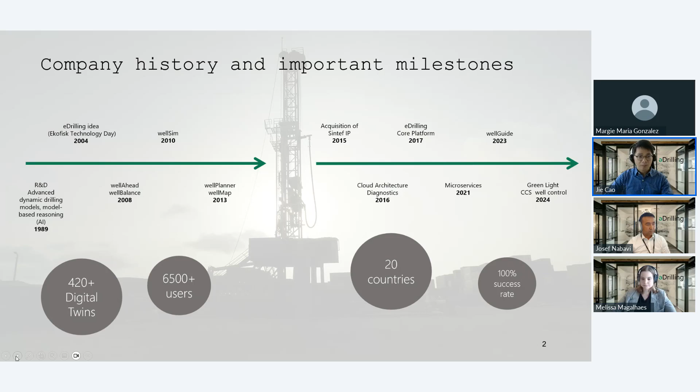So next, with more than 2 decades of R&D, now eDrilling has a suite of drilling software for the whole life cycle of drilling process, from planning, preparing to executing or reviewing your drilling operations. Those softwares have been used and verified by the industry for almost 2 decades. Those different pieces of software aim to meet different challenges in various phases of drilling using our unique state-of-the-art technologies.

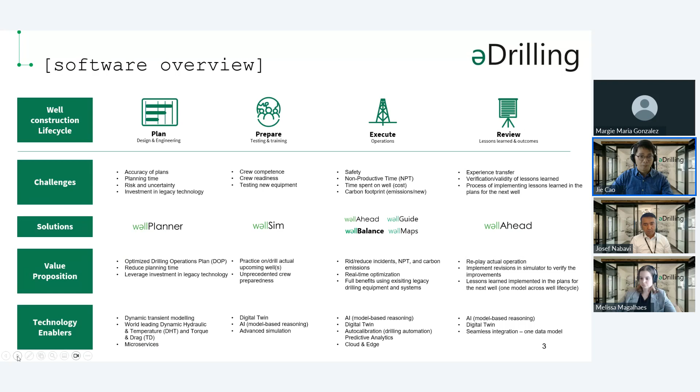Today, we will be focused on MPD software, which is wellBalance. But of course, if you are interested in other applications or software, you are more than welcome to ask for a demo. So back to wellBalance, the MPD software.

In general, it is advanced software to improve any of your MPD control system to better keep constant bottom pressure during your MPD operation. It is enabled by accurate dynamic, thermodynamic, and hydraulic modeling. It is reliable to accurately control your pressure and help you to optimize your planning and specific procedures.

How it works? It is embedded with any of your third-party control system with input from the operations, and it continuously simulates the pressure profile, temperature profile in the well, and acts as the brain of your MPD control system. Besides, a 3D visualization module is also available while drilling to help you to navigate to where you should pay attention to, like the ECD at casing and the pressure at the bottom hole, etc.

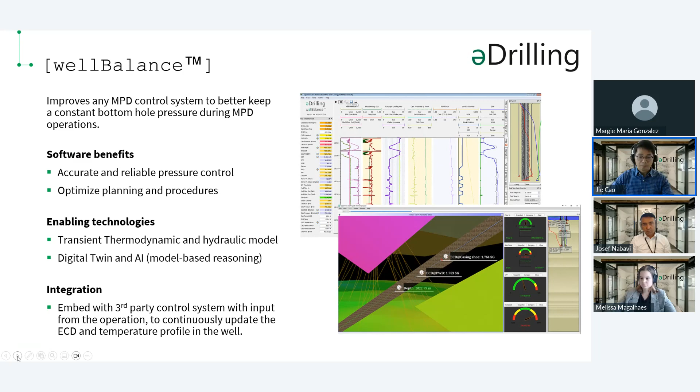So next slide, we have the software which has 2 modules. One is the MPD real-time. We call it wellBalance to help you control and to provide set points for your MPD control system based on the dynamic real-time simulation.

The other module called wellBalance Offline is used to plan, to test, to analyze your MPD operations and procedures. This is offline software that you can play with on your computer, not in real time. It complements the real-time wellBalance software.

The dynamic model mentioned accounts for essential effects for MPD, like dynamic surge and swab, various pump rates, drill string rotation, dynamic temperature effects, cuttings transport, and also set point pressure at any depth, even though we usually use it at the bottom hole. The supported operations include drilling, reaming, running strings, tripping in and out, cementing, fluid displacement, static periods, and other dynamic tests like formation integrity test, leak-off test, and pore pressure test.

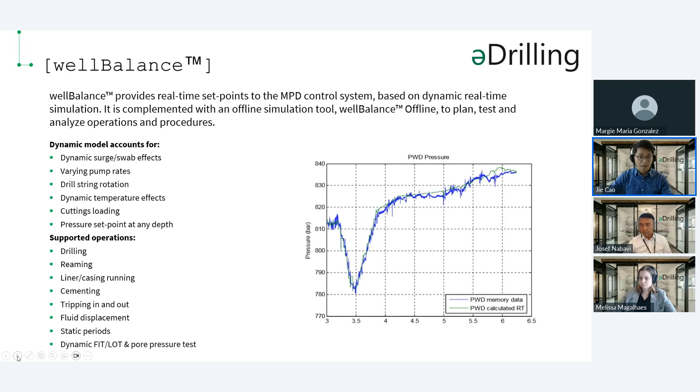So the superiority of this software is mainly due to the accurate dynamic modeling we have used for this software. This has been verified and recognized by the industry for the last 2 decades. Compared with the commonly used steady-state models, it automates continuous modeling of the profile from real-time data and previously calculated data sets. This results in accurate temperature and pressure profiles together with the fluid and cuttings transport.

It also includes the transition period effects when changing operational parameters. Therefore, the drilling pressure margins are precisely narrowed such that you can reduce the uncertainty associated with your operation as well as the operational risks.

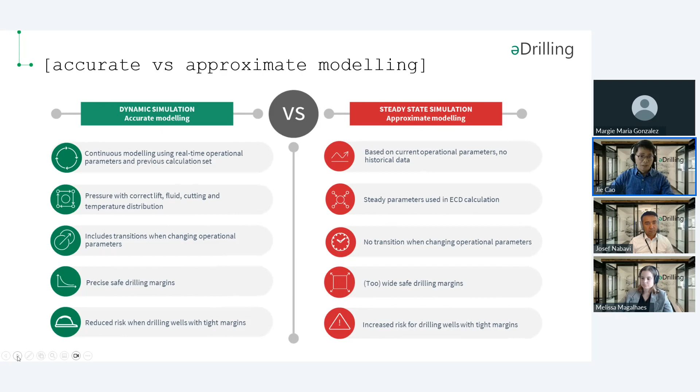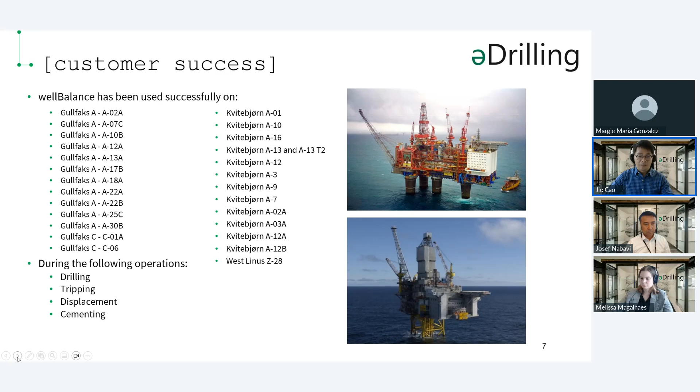So the software has been used in many wells since 2010, especially in the North Sea, like the wells we listed over here. And the operations for those wells are drilling, tripping, displacement, and cementing, of course, together with other tests and experiment tests. So this software has been successfully used, verified, and recognized for MPD operations.

In the next slide, we listed a few operational examples to verify the simulation. First, on the left is the dynamic FIT test. As you can see, especially in the middle, the blue dots increase stepwise, and the simulated results match the real-time measurements very well. On the right figure, we have the dynamic drawdown shown by the green dots, and the simulation, which is the line, perfectly matched the whole process, which means the simulation is as accurate as possible.

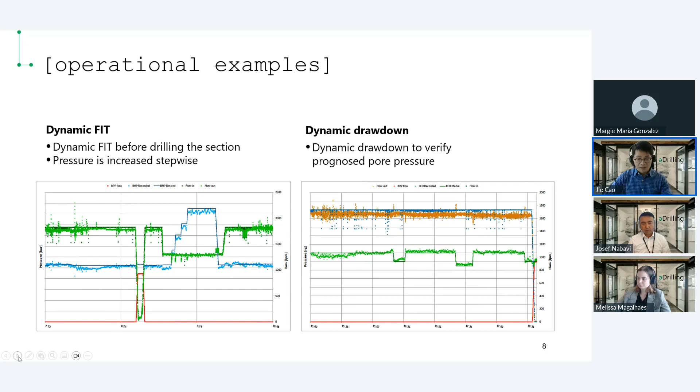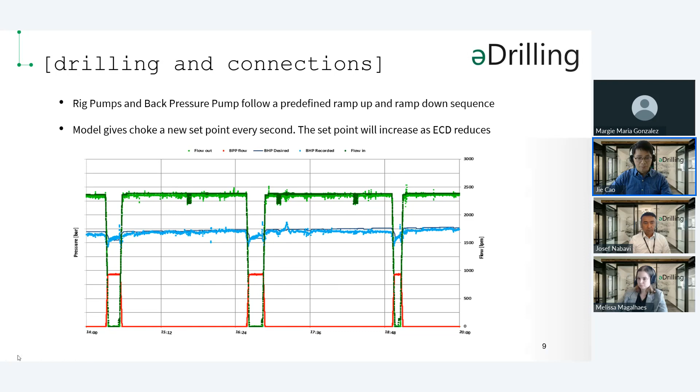In the next slide, we have drilling and connection operations. This is a predefined pump ramp up and ramp down sequence. So we try to simulate the process with our advanced model. As you can see, the flow out and flow in, in the green dots, ramp down for a period and then ramp up. It's a predefined sequence, and the results from simulation can perfectly catch the trend, the change, and the dynamics in real time. So those are pieces of verification of our simulation.

And next, let's join Josef for the real play of the software. So, Josef. Thanks, Jie. I'm going directly to demo the software. Let me share my screen. Okay. Can you see my screen, Melissa? Yes. Yeah, good. Thank you. Okay.

As Jie mentioned, the wellBalance system has two parts. One part is offline wellBalance, which is used for the planning phase or optimizing the planned operational parameters. This one is a standalone software which can be used by itself to do any type of MPD or other type of simulations. To run a simulation on this software, you need some input data. Let me go through that quickly.

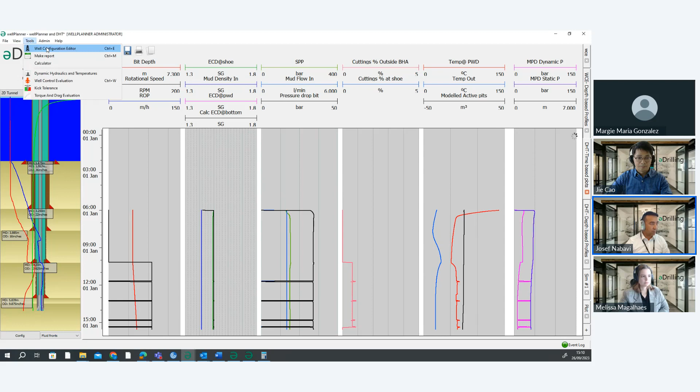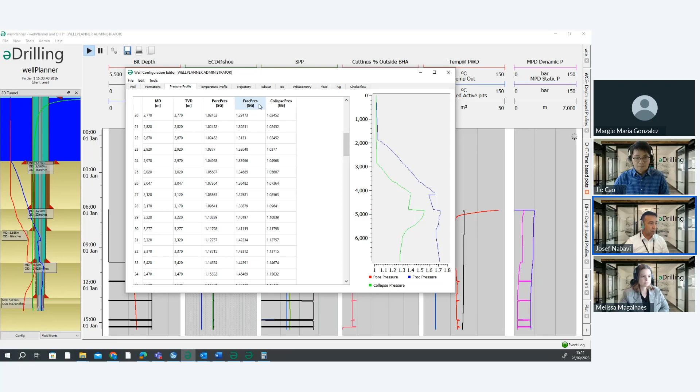If I click on the tools, there is a well configuration editor. This is the static data you need to input into the software to create a digital twin of the wellbore you are planning to drill, or any other type of operation. For this purpose, you need input data: formation tops, pressure profile, pore pressure, fracture pressure, and collapse pressure. Temperature profile, static temperature, and then you have the geothermal gradient here.

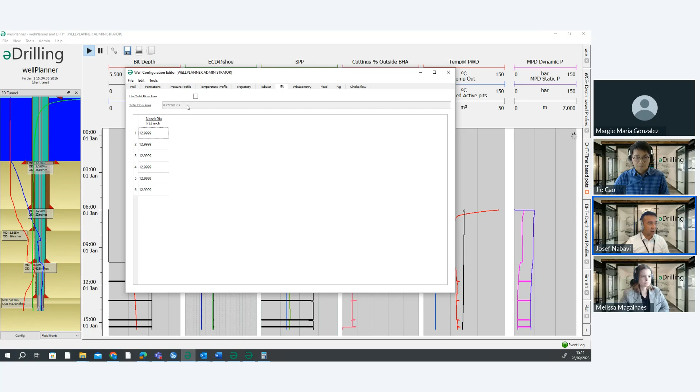Trajectory, tubulars, both BHA elements and different types of drill pipes. Bit, either you input the nozzles or you can only input the TFA; one of them should be okay. Wellbore geometry, you have here different casings, liners, and the riser. If you have an open hole, you add your open hole here as well. On the fluid, you add rheology, PVT table if you have it, gelling, and those parameters.

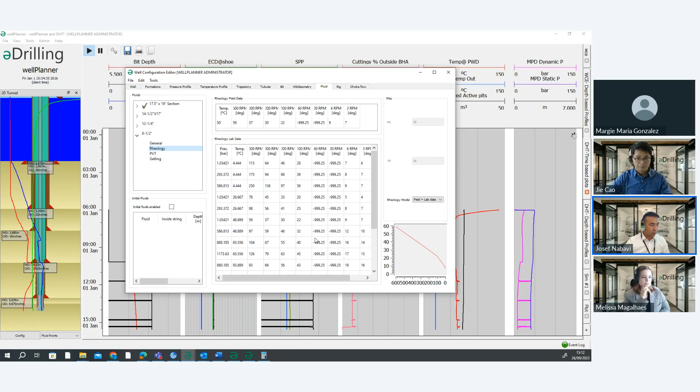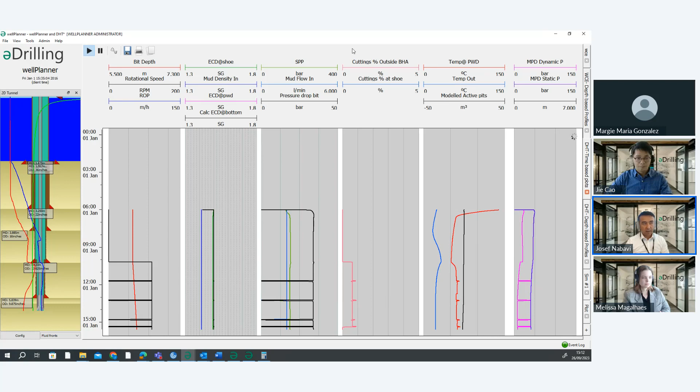Let's see if I click here. You can add the rheology from the field, and if you have more readings, you can add them here. PVT table, we don't have it in this demo case, but you can add that as well. And then you have the gelling data. These are the parameters you input into the software, and after that you run your simulation. These parameters can either be directly imported from a third-party source, if available there, or if you have an Excel file, notepad file, or any other files, you can copy and paste from the files into the software.

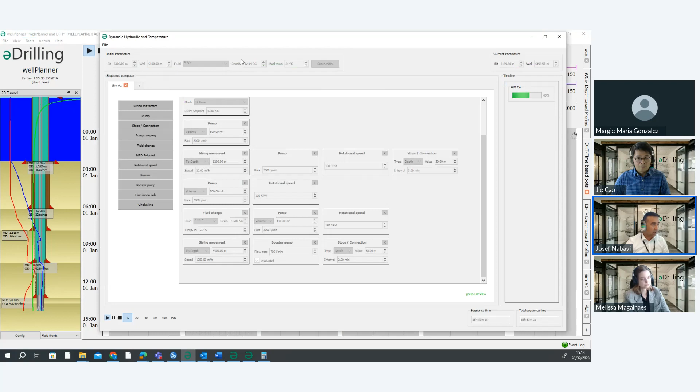When that's done, I'm basically ready to do a simulation. If I go to tools again, I see this one, dynamic hydraulics and temperature. If I click that one, this window pops up. In this window, this simulation I have already created just for the demo purpose, and it's running. That's the reason they are gray; I'm not able to move the boxes around. They are closed now. If I stop the simulation, they become active, and then I can move them around.

So, and then these boxes will become active as well, in the different types of simulations. So you just drag and drop the boxes from the left side inside this box to create your simulation. If you are drilling, very simple: you need a string movement, you need a flow rate, you need rotational speed, and then you need a connection.

For the tripping purpose, let's say that here, the last line is pulling out of hole, to show you later on. We can go through that as well to show you the surge and swab effect and how the MPD system is working when you are pulling out a full BHA, or if you have a liner or casing for that purpose.

So here you just add a string movement, and then the booster pump is used like a trip tank pump here, to fill the well when you are pulling out of the hole. And then you need a stop and connection. So based on what you need for different types of operation, you just drag and drop here in a line. Each line is one simulation type. So it's very easy. Just drag and drop, and that's it.

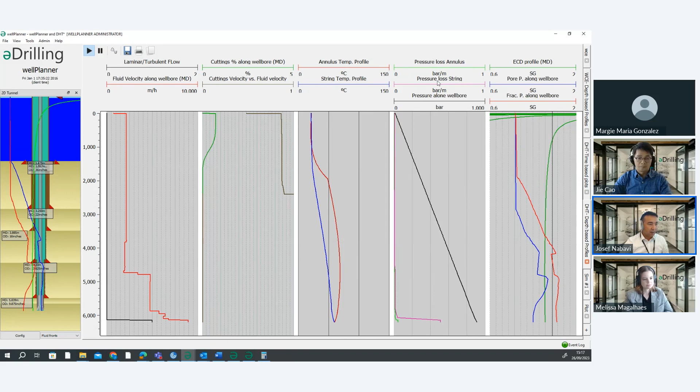Here you have the pressure along the wellbore. The black line is very small at the surface, only some bars, maybe 10, 15 bars, because we are keeping some back pressure, and then it's increasing downward. Here is the pressure loss in the annulus and inside the drill string due to friction. As you see, around the BHA the friction loss is much higher due to the smaller size, and then it's a bit higher in the annulus around the bit, and that's decreasing.

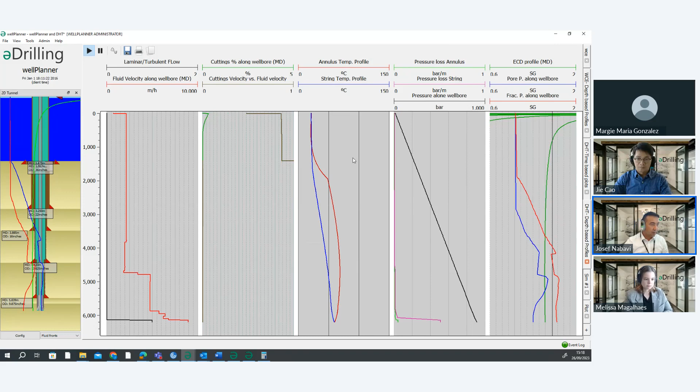Pressure and ECD profile along the wellbore, and then you have the pore pressure and fracture pressure here. Then you see we are moving the cuttings almost out. So let me just go quickly here again. This was the drilling part that was finished. That was circulating the hole clean, still running. And after this, we are pumping a bit heavier mud, meaning we are moving to displacing to tripping mud. So next is to move to this stage of the simulation.

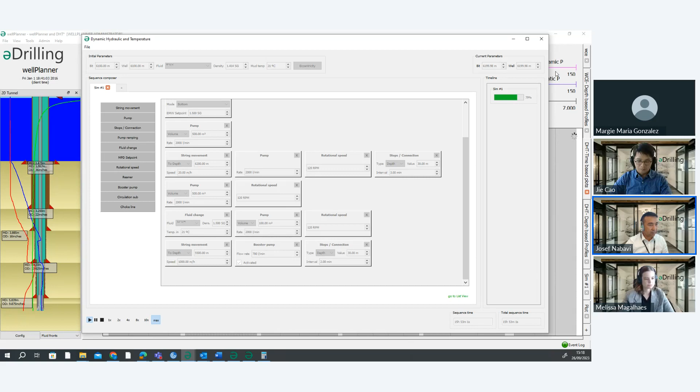Once we are moving here, as you see, you can see on the 2D tunnel as well the next fluid going down inside the string and up through the annulus here.

So if I go to the effect of the different parameters in the simulation, as Jie highlighted in one of his slides, the eDrilling's MPD model takes into account all the effects that you can have during drilling and tripping operations. So as you see, the temperature is higher. We are pumping here, cooling down the well. And then here we are cooling down slowly, almost getting stabilized here.

At this area, we start drilling. And you see, we are creating a bit of cuttings around the casing shoe and around the BHA. And we are starting the rotational speed at the same area as well. As you see, when we start the rotational speed here, our set point surface pressure is decreasing. That's related to the rotational effect. If you are rotating with this RPM, then you don't need that surface pressure. The surface pressure will be a bit lower. That's the effect of rotation on the surface pressure calculation.

And then again, as you see, if I move my mouse a bit to the left, the pink one and the blue one, both of them are continuously decreasing until this point, and then stabilizing. The area which is decreasing, that's related to the cuttings. We start drilling, cuttings fill the well, and then the density in the well is getting higher. Then there is less surface pressure required to keep the same set point. And then here at this point, the whole well is filled with cuttings, and then it's getting stabilized.

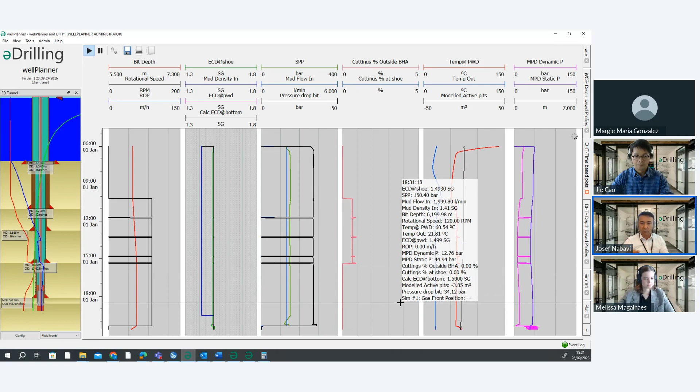Here, as you see, the surface pressure is increasing again. This is when you are circulating out the cuttings. So you are removing the cuttings from the well. So you need to increase the surface pressure while you are cleaning the hole, because you are removing the cuttings from the well. And then circulating the hole clean here.

At this area, we start pumping the heavier mud, or you can call it the tripping mud, or the pill, that you are pumping in the open hole. So you see the standpipe pressure start decreasing when I increase the mud density here. And then later on, when the heavier mud enters the annulus, the surface pressure is decreasing as well.

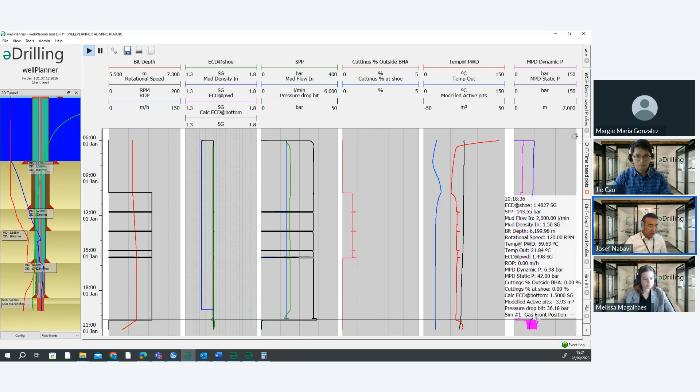And then at this point, we are pulling out of hole. If I zoom into a smaller area, you see now pulling out of hole. When we are pulling out of hole, the system requires higher surface pressure to compensate for the swab pressure. And then when there is a connection, this goes back to the same value as before.

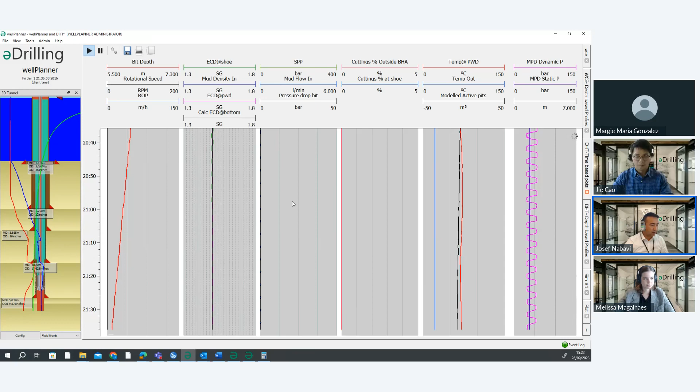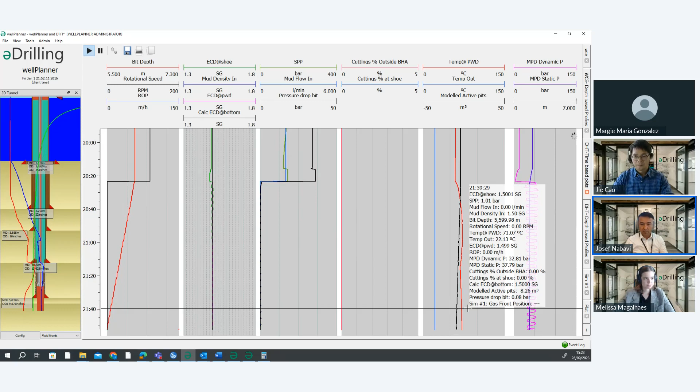The simulation is still running. I think it's not much left on this. It's 97%, almost completed. Let me just zoom a bit more. As you see, the surface pressure changes are much higher at the beginning, and then decreasing upward. That's because your bit is far away from the bottom of the hole, where you keep your set point, so it's creating less swab pressure at that point, and that's why the surface pressure changes are smaller.

Let me move quickly to the real-time one because of the time. Here is the real-time one. The other one was the offline mode of wellPlanner. This one is the real-time. This is the model which can be embedded into an MPD system and then control the set points, taking into account all the dynamics of the well, including temperature.

So here you can connect to the data source in two ways. Either you use WITSML or OPC UA. OPC UA is preferred because that's changing in real time. There are some lags on the WITSML data, and that's not very preferable. Here you choose a set point, as you see my mouse in the lower left corner. You can either keep your set point at the bottom of the hole, or choose a set point and define the depth. That depth you can define anywhere in the well.

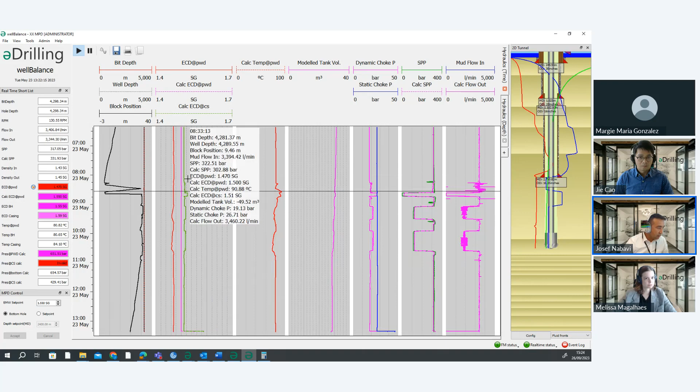If I increase my set point now, let's see, if I increase to 155, everything is changing. As you see here, if I zoom a bit small, you see my ECD is changing, and then the surface pressure calculation and everything is changing here as well. And then when you reduce the pump rate, as you see, the surface pressure is increasing automatically all the time. So this is the same thing.

The input data here is the same thing. So you have the formation pressure profile. This is exactly what I showed you in the offline mode, meaning that when you have created your digital twin well configuration, you can use it directly in real time. So you don't need to spend time on that and create a new well configuration.

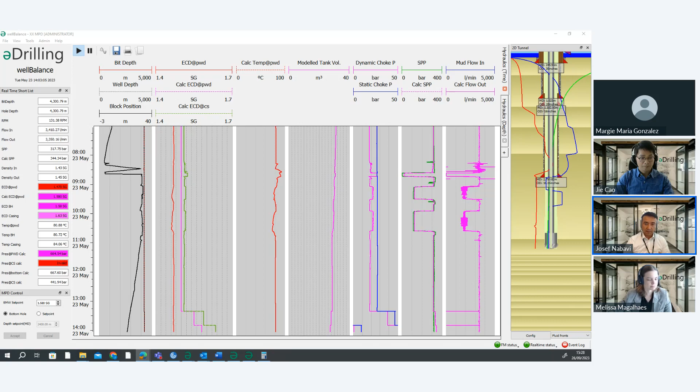Next question for Josef: how does the software retrieve data or connect with the MPD system on the rig? Normally, the system is using OPC to connect to different sources of data on the rig side. The good thing with OPC is that it's changing all the time, in real time. You can use WITSML as well, but as I explained earlier, there is a bit of lag on the data. So you may not be able to keep the set point during real operation as you would like to. Because when we are embedding our MPD system into a third-party MPD physical system, we are providing the expected surface pressure, and based on that, the MPD system will close and open the choke.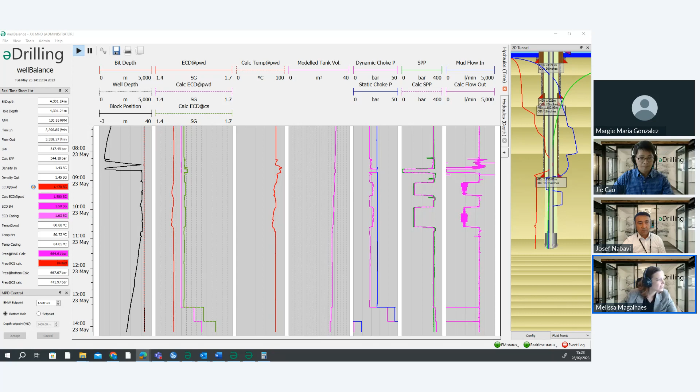As Jie mentioned, Halliburton GeoBalance in the North Sea have been using both the offline and online versions of MPD in the last 10, 12 years in many wells. In addition to that, our MPD training facilities have been used by many companies, and they're still using them today, to verify their procedures, to verify how their MPD chokes are working, to test their MPD chokes and so on. And the offline version is used, if I remember correctly, by 3-4 customers right now. They are using it all the time to plan their wells.

Just a few more comments: as you said, the software can be used for multiple purposes, for example, training engineers in MPD operation. That's widely used together with other software like the visualization software and other simulation software. And for MPD, we have both offline and online. Some collaborators have both, and some have the well planner for the planning phase, which is wellBalance offline. So together there are many users and collaborators, and it depends on your purpose and how you want to use them.